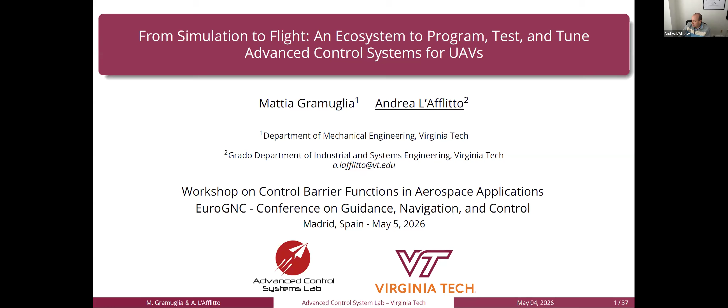Thanks for having me. Mattia is defending in a few hours, so he'll be officially a doctor by this afternoon, US time. So it'll be me giving this presentation. A good part of this work is from his master's and PhD with me.

We're going to talk about how we can use barrier functions in the context of model reference adaptive control, in particular time-varying barrier functions, and then how we can apply these theoretical results in practice, particularly to unmanned aerial vehicles.

The context we're working in is MRAC, model reference adaptive control. What we want to do, which wasn't possible in the literature before our work, is to have both hard and soft constraints enforced by an MRAC system: hard constraints on the tracking error, as well as soft constraints such as actuator constraints. The hard constraint problem was already solved, but at the cost of having very aggressive control inputs.

Existing methods on constrained MRAC rely on barrier-Lyapunov functions. In some cases, they use barrier-Lyapunov functions to enforce the rate of convergence of the tracking error to zero, or equivalently of the closed-loop plant trajectory to the reference model. However, this approach can be particularly aggressive, so we address this problem as well.

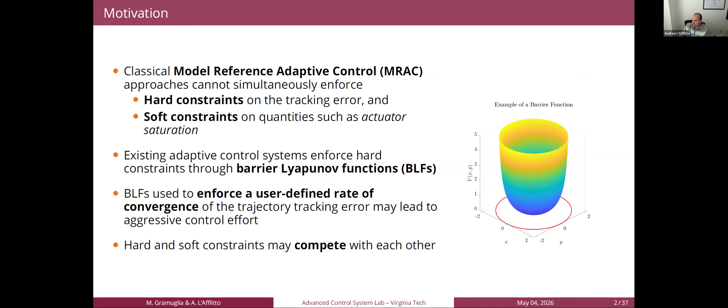Finally, we address the problem of how to mitigate the fact that multiple constraints on multiple aspects of the control system, such as tracking error or saturation, may be competing with each other. Because of course, if you have higher tracking error, you may also need higher control effort.

So what we want to do is create a control system, an MRAC system, that enforces hard constraints on the tracking error, and soft constraints on user-defined parameters, such as the saturation of the control input. We'll refer to this problem throughout the presentation, although the saturation constraint can be replaced with whatever other soft constraint you'd like to impose.

We also want to mediate between hard and soft constraints, be robust to unmatched uncertainties—we'll discuss this kind of uncertainty, which is among the hardest for adaptive controllers in general, and MRAC in particular—and then enforce the rate of convergence without using barrier-Lyapunov functions.

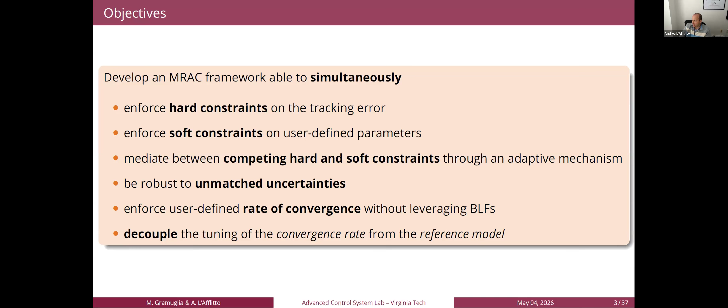So we want to use barrier functions to enforce the constraints on the tracking error and other soft constraints, but not to set the rate of convergence. This means decoupling the tuning of the convergence rate from the tuning of the reference model, which has been a key issue in the adaptive control community, leading for example to the development of L1 adaptive control or other modifications of MRAC that have been fairly popular in the past decade.

For those not familiar with MRAC, here's a quick overview. We basically have a plant model in this form, where the matrix A is unknown, the diagonal positive definite matrix lambda is unknown, and nonlinear terms are assumed to be matched, meaning they go through the same channels as the control input.

These terms are divided into two parts: a regressor vector that can be physics-based or produced by a deep neural network, whatever method you like, and then a matrix of coefficients that is unknown. Of course, not all uncertainties can be captured this way—we'll discuss a more general model in a couple of slides.

So despite the fact that we don't know A, lambda, and theta, we want to find a control input U such that the state X of the plant follows the reference trajectory xref. And xref is basically the solution of this model here.

In MRAC, we can see reference models either as a filter of the reference command input R, which is a bounded continuous signal provided by the user, or as your ideal model. Say the plant model is your actual aircraft and xref is your ideal aircraft, and you want the actual aircraft to behave like the ideal aircraft controlled by the pilot, r_cmd.

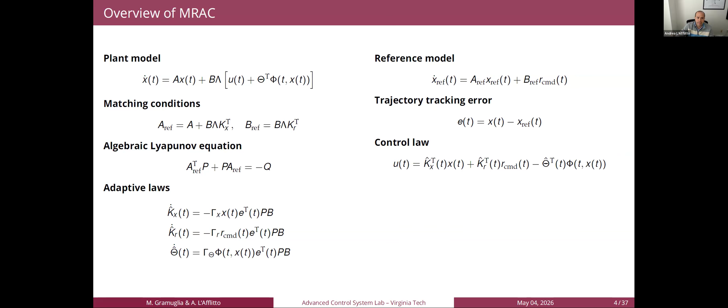A variation of this method, dating back to 2011, allows us to accelerate the rate of convergence of MRAC in a user-defined manner. A typical problem of MRAC, in the class of MRAC solutions—again, the one I showed is the most basic one—is that it can be proven that the closed-loop plant model converges to the reference model only after the transient of the reference model has died. This is a problem because we spend so much time shaping the reference model, and we only mimic the ideal model after the transient—which to some extent is the most fun part—has decayed. We don't want that to happen.

So we want X to converge to X_REF before the transient of X_REF has decayed. My group, about 10 years ago, came up with this technique. It's called two-layer, where we introduce an additional reference model, an auxiliary reference model, which is totally user-defined. The role of this auxiliary model is to accelerate the closed-loop trajectory tracking error, such that the convergence is set by the user.

How does the user set the auxiliary reference model and the rate of convergence? The user can choose the eigenvalues of this matrix A_tran such that they sit to the left of the eigenvalues of the matrix A_ref that characterizes the primary reference model. The farther the eigenvalues of A_tran are to the left of those of A_ref in the complex plane, the faster the convergence of the tracking error to zero—or equivalently, of the plant model to the reference model.

So what happens is we need to introduce an additional variable, epsilon, which is the difference between the actual tracking error and the second layer. But we can see that A_tran is Hurwitz, so E_tran converges to zero. So after some transient, epsilon and E are pretty much one and the same.

We modify the control law by adding to the MRAC control law an extra term and an additional adaptive law for kg. The structure of the adaptive laws remains the same; however, instead of referring to the tracking error E, we need to refer to the auxiliary tracking error epsilon throughout. But conceptually, not much has changed.

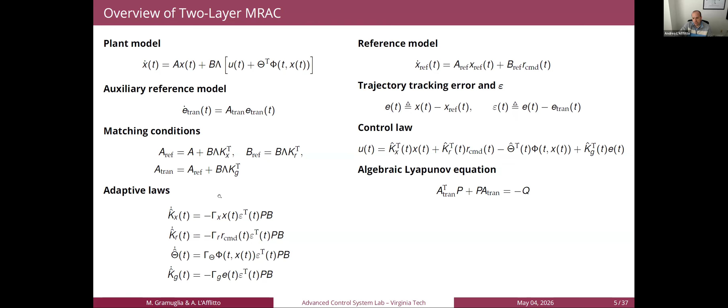There's a whole learning theory about that. So there's always going to be some error, and this error is basically captured by the unmatched uncertainty. A famous problem with unmatched uncertainty is that although you may drive the tracking error to a small value, the adaptive gains may experience so-called parameter drift, which was a serious issue that halted research on adaptive control in the 80s, until this problem was seriously solved.

The most common solution is to use the continuous convex projection operator, where we take the usual adaptive laws and constrain them—without going into the math details, since that's out of context for today's presentation. What the projection operator does is create two constraint sets of identical shape that are convex, an inner one and an outer one.

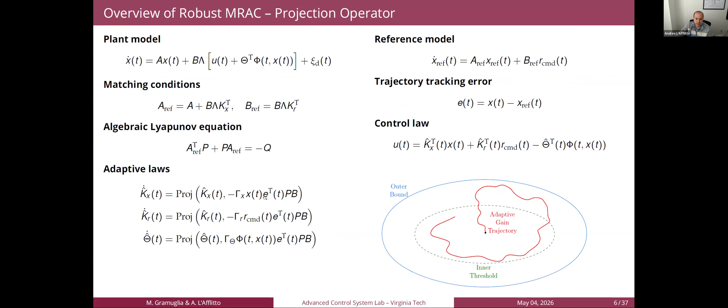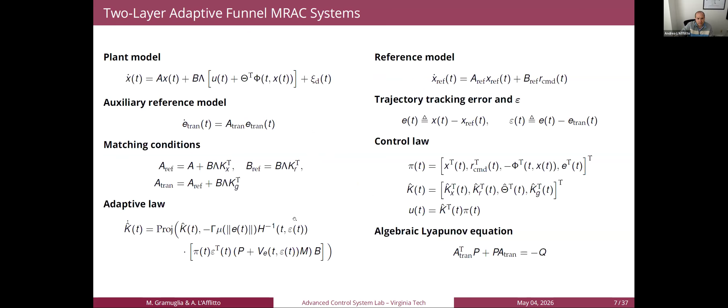And so the term Ve is our Barrier-Lyapunov function, which is given by epsilon transpose P epsilon, the usual Lyapunov expression for most linear systems, over h, which is again our constraint function. So it's time to introduce an important actor for us, which is this term xi, not to be confused with xi d. This is the disturbance. This is something else.

Which basically is a function that captures the soft constraints. So the constraint set epsilon that we have over here, or script E, is a hard constraint set, so we can't violate this constraint no matter what. But now we introduce also soft constraints which should be accommodated, but we don't accommodate them unless strictly necessary.

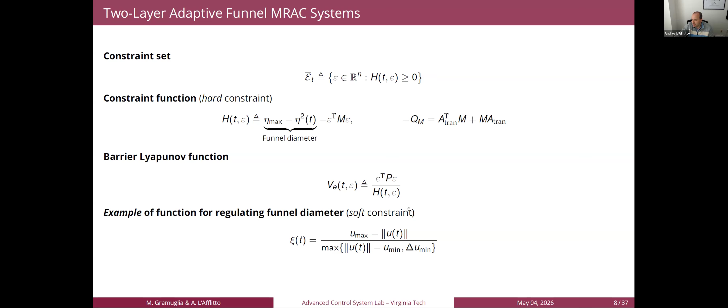And for example, if you want to enforce constraints on the saturation, we can do something like this. So we want U in norm not to be smaller than U min and not to be larger than U max, with a certain threshold or tolerance, delta U min.

So how do we choose the diameter of the funnel of the constraint set? We do so adaptively. So we have basically an adaptive flow also for the constraint set. I'm not going to go through

this math, I mean, it's not the case for an oral presentation. But I'd like to point out that basically we have this lambda sat term that appears in sigma nom, which is what drives the adaptive flow. Basically it says, well, if your system is able to accommodate this kind of constraint, if the dynamics of the system is able to accommodate a constraint that gets stricter and stricter, then do so. Otherwise, keep the constraint as is, or relax it as much as possible, waiting for a more favorable condition.

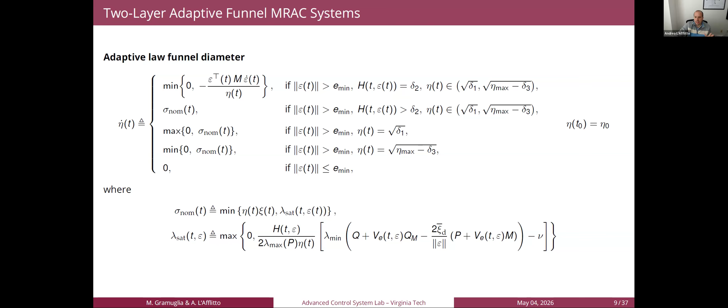Um, so here's a graphical representation of what's going on here. So basically, the user says the tracking error cannot go beyond eta max no matter what. And in reality, because we need to account for digital implementations, we're going to give a certain buffer, which is delta 1, such that when we implement this continuous time formulation in a discrete time formulation, we don't violate the constraints.

And so the boundary of the constraint set is represented by this red line. And again, to account for digital implementations, we don't want the weighted tracking error to be delta 2 closer to the red line, the boundary of the constraint set.

Now, if possible, we try to reduce the constraint set as much as we can, as it happens in these gray banded areas. However, there may be some situations in which, for example, enforcing those hard constraints on the tracking error may require too much control effort. So the actuators may start saturating.

So we try to relax the constraint set a little bit and see what happens. And so the red line increases a little bit, but then in some situations, we get way too close to the hard constraint imposed by the user. So at that point, the actuators will need to start suffering a little bit.

And so basically, we stop the growth of the constraint set and see what happens. If a more favorable situation arises, then we keep shrinking the constraint set. On the other hand, we don't want to shrink the constraint set way too much because that may start producing a lot of stress for minimal improvement. So at that point, basically, the constraint set will not go below delta 3, which is larger than some minimum requirement given by the user.

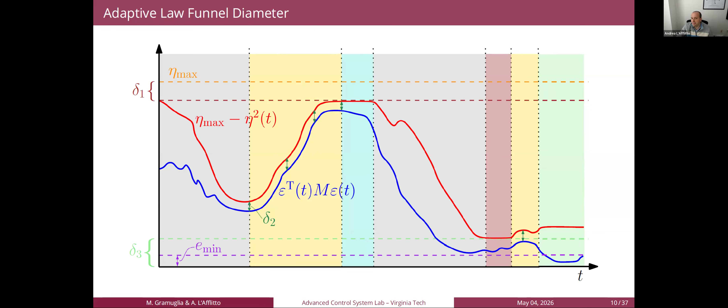And so this is your happy area, right? If you're here, your system is doing well enough from an engineering point of view. I remind you that we're using the projection operator to constrain the adaptive gains and hence implicitly the control input. So it's not an explicit constraint on the control input, the use of the projection operator, but it's sufficiently good. And in most applications in adaptive control, that's how basically we enforce constraints on the control input.

So let's go through numerical simulations.

When we started this project 3-4 years ago, we asked ourselves what are good simulators for UAVs, particularly multi-rotor UAVs. We were looking for something suitable for control applications. What I mean is we wanted something for which we didn't write the equations of motion ourselves, that was able to account for unknown payloads, moving payloads, sling payloads, interactions with the environment, and that was reliable.

The last two were explicitly designed for UAVs. However, they didn't have finite element methods or didn't allow for contact forces, didn't allow for sling payload, and in the case of Flightmare, there's basically no documentation, which makes it extremely harder to manage.

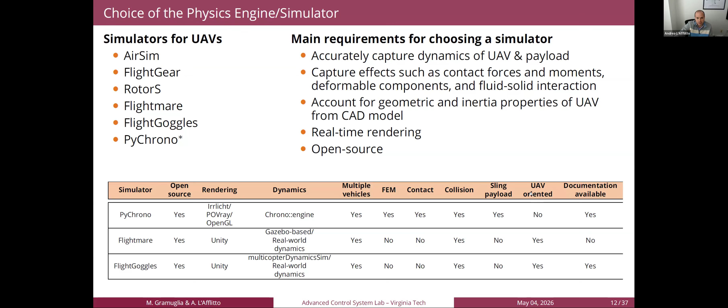We landed on PyChrono, which is a high-fidelity finite element-based simulator that is developed primarily for mechanical engineering problems for ground vehicles. We've been the first ones to port this to a UAV environment. In fact, you see that it was marked as UAV oriented as 'no', because that was not the case before our work. So what we did, basically, was import a high fidelity CAD model of the actual vehicle.

Then we launch a mission, and we can do things like payload dropping, moving payload, and stuff like that. We tested this on a PC with 14 cores and 20 threads. And what we can do is run up to 20 simulations if you have 20 threads available, so we can run hundreds of simulations at the same time and see how our controller performs in multiple scenarios.

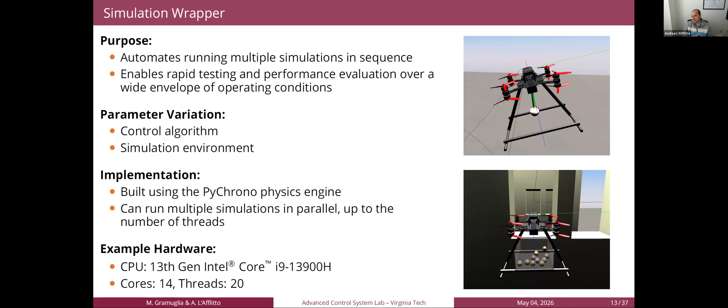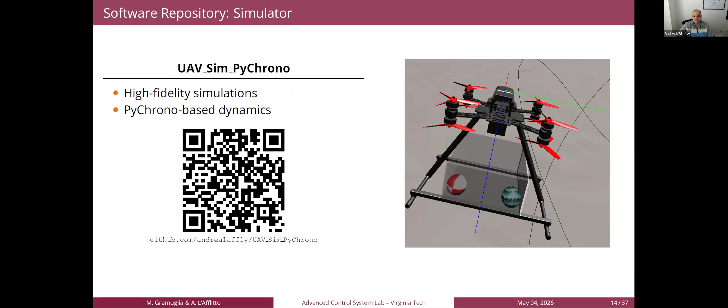So this is completely freeware. It's available on GitHub, so you can connect to our GitHub through this QR code, and the slides are available. And as I said, you can run hundreds of simulations and do parametric studies, for example.

These kinds of controllers have many tunable parameters, so we want to see what happens if we change some parameters and what's the sensitivity of the system to some of these parameters.

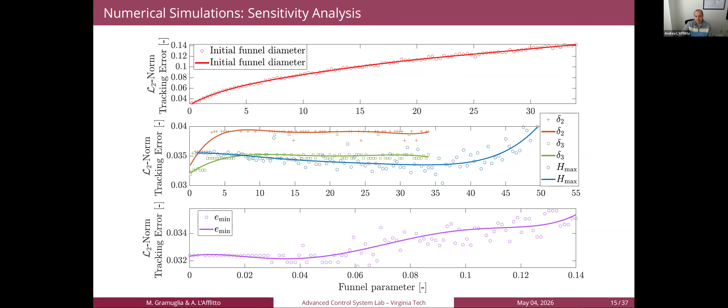So here's a quick video showing you how the control system we discussed earlier performs over two other control systems. 7 is a non-robust version of what I presented to you today, so without the projection operator modification. And 8 is a similar control system.

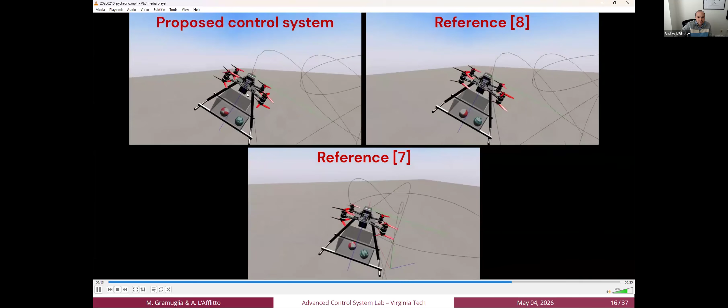As you can see, we're transporting two balls in a container, which are totally unknown to the control system. So what we did was tune the controller without the payload, then put in the payload and asked it to follow some trajectory.

And as you can see, the theoretical framework we showed earlier allows very good tracking for our control system. Another one didn't do well at all. It crashed, actually. We cut the simulation because it crashed.

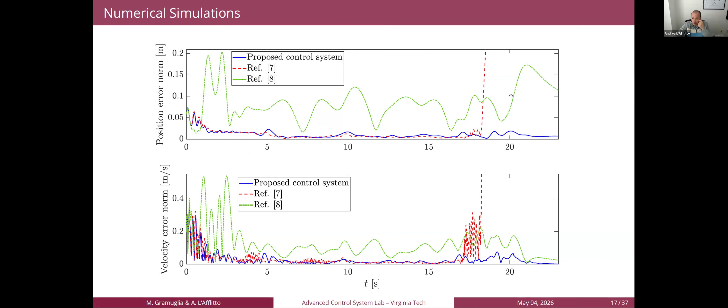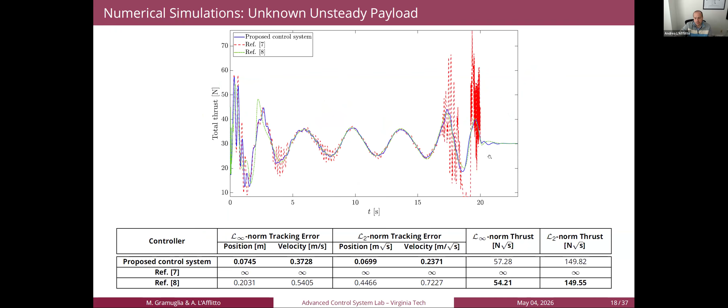And then a third method didn't do as well in terms of tracking error. Likewise, we do not only in terms of tracking error, but also in control input, because the thrust is extremely similar between the two. Mind you, the thrust model we use is experimental—we characterized actual propellers, created an analytical model of the thrust, and imported it into the controller and simulator, so it works.

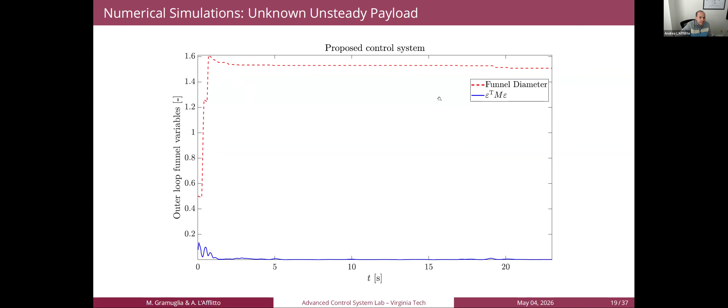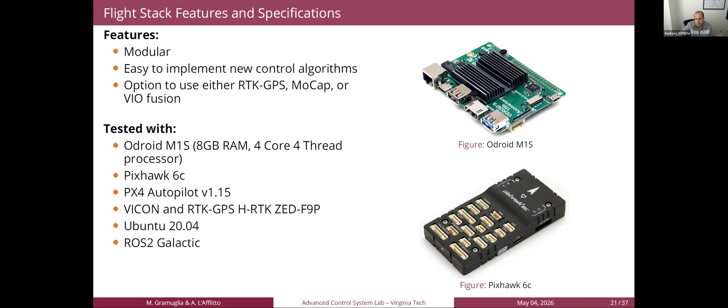We tested our results experimentally on an Odroid, which is a single board computer installed on a UAV. It talks to a Pixhawk that serves basically as a coordinator of our propellers.

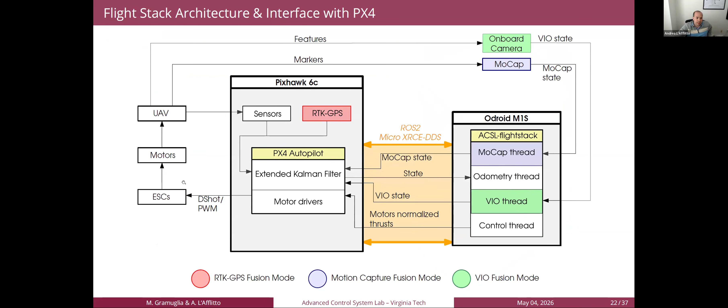The way the system works: the Odroid manages the control thread, taking data from a motion capture system or onboard cameras, depending on how you want to fly. The Pixhawk has a Kalman filter that manages the sensors, the information from onboard cameras for localization or Vicon, and it manages the propellers.

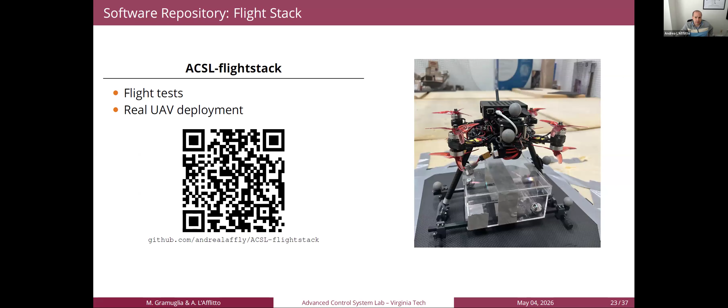This flight stack is publicly available on our GitHub, and anybody's free to contribute. We have detailed wikis so anybody can reproduce our results, and we also store flight test results for reproducibility purposes.

So this is our vehicle—the actual vehicle you saw in simulation earlier—and we added a sling payload, which is this ball over here. If you have this thing fly, you'll see that.

So these are nine flight tests. They're all different, and you can see the vehicle following a certain trajectory and then landing back on its landing pad in nominal conditions.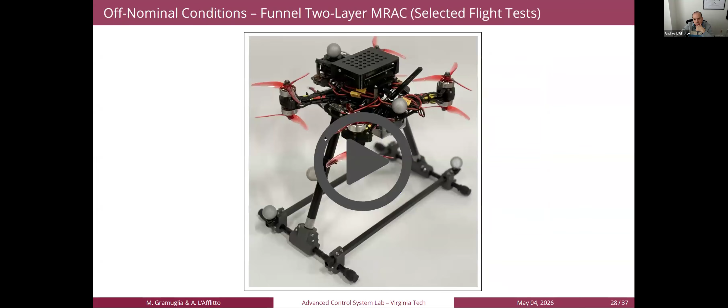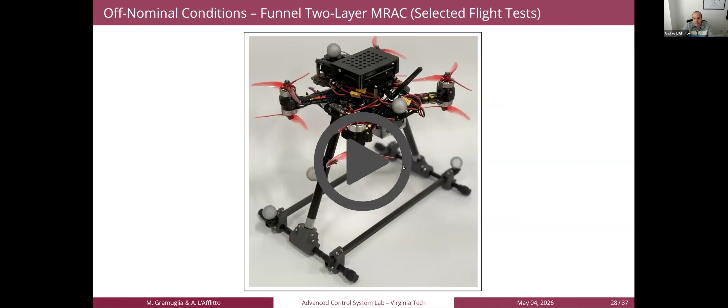In off-nominal conditions, carrying a little ball as I showed earlier, the vehicle is able to follow its reference trajectory very well, despite the payload being 30% of the total vehicle mass. With other techniques, we don't do as well, and these results show the quality of our performance.

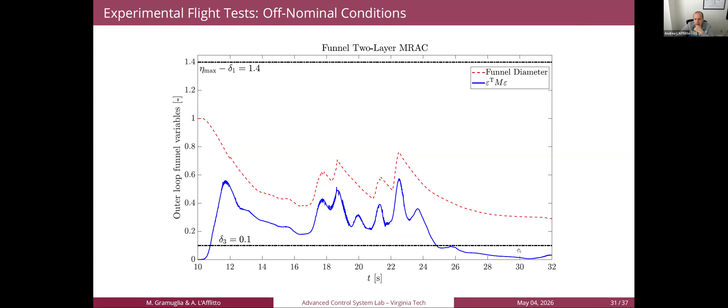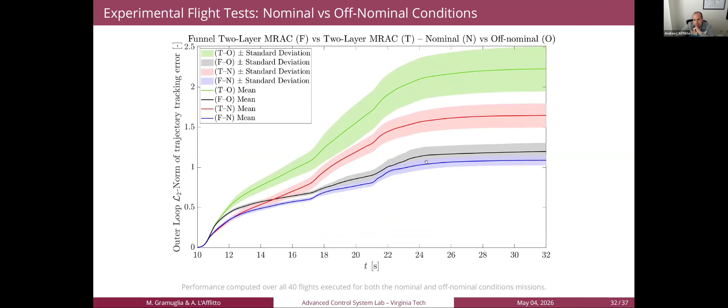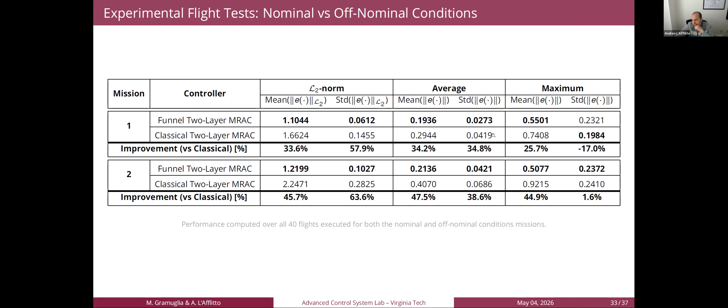We can see that eventually the tracking performance is always satisfactory. In some cases it drops below the non-adaptation point of the other constraint set. These are the L2 norms, and we can see that even in the off-nominal case, our controller does better than the nominal case of other techniques, which is really impressive to us. Also, the control effort is smaller, which is quite interesting—so we not only do better tracking in terms of tracking error, but also better in terms of control effort.

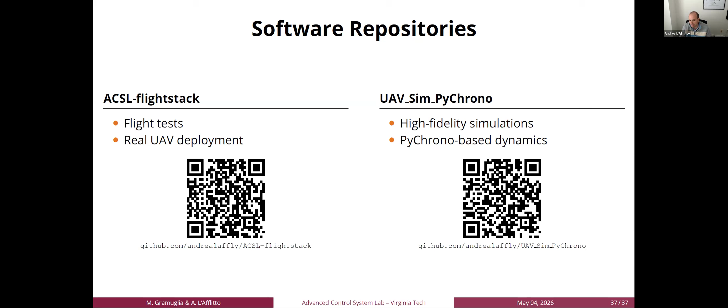Our simulator is so good—again, we worked hard on the CAD models, I'll give you that—but they give us a very solid starting point for the adaptive gains to test in flight, which reduces our sim-to-flight time and the number of hazards and accidents in flight tests. With that, guys, I think that's it.